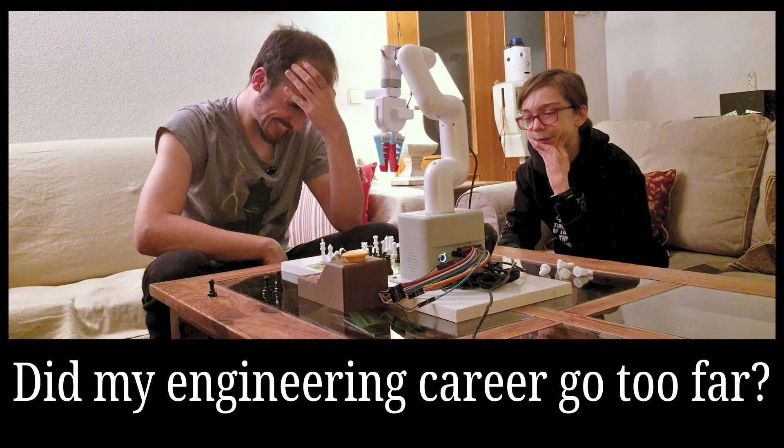This is a robot arm I coded to play chess completely by itself. And this is a chess Grandmaster, one of the best players in the world, about to be beaten by it. How did we get here? Well, hold tight, because this gets crazy.

So first, the big question: how did I get my hands on one of these? It all started when the guys at Elephant Robotics, a Chinese robotics company, contacted me for a collab. They offered to sponsor a video with a robot of my choice, to make a project of my choice, and afterwards I get to keep the robot. Of course I was thrilled, it was the deal of my life.

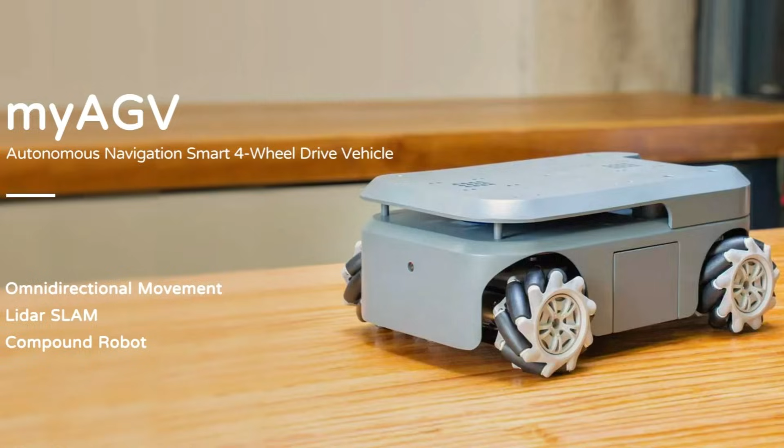I already had some experience with mobile-based robots, and at the time I couldn't think of a cool project to do with one of those, so I decided to go with the myCobot robotic arm. I came up with a few ideas for what I could do with it, and I do intend to do them all eventually, but for this collab I would turn it into a chess player.

But I wouldn't just settle with making it play chess, oh no. I would turn it into a player so insanely skilled that no human could ever beat it, not even the world's top Grandmasters.

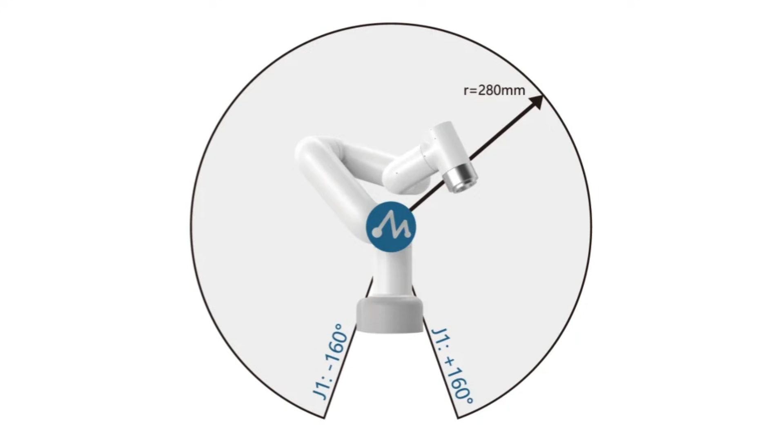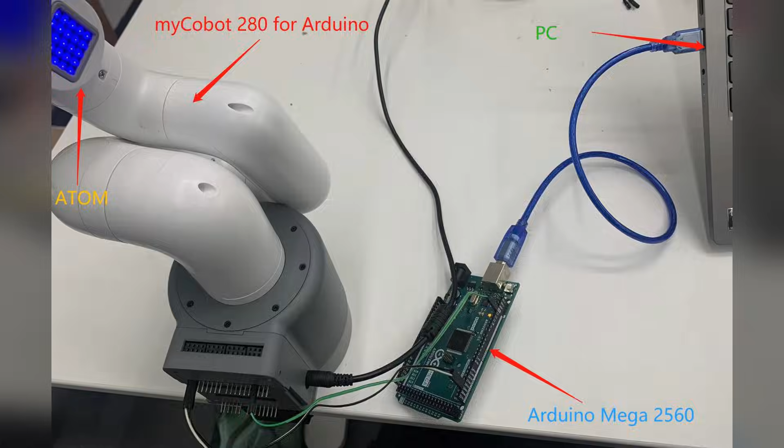However, I had a choice to make, because they offered 4 different flavors of the myCobot 280, with 280 standing for its 280mm working radius, basically depending on the way you control it. There's the myCobot 280 Arduino, meant to be controlled with an Arduino. There's the myCobot M5, a more user-friendly version which can be programmed with simple apps and drag and drop.

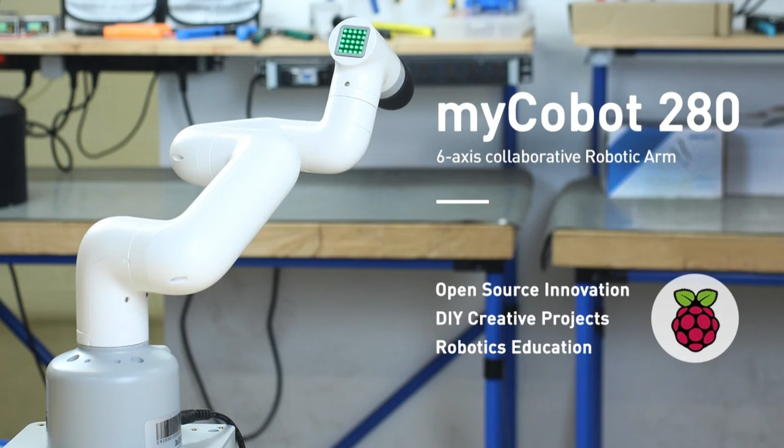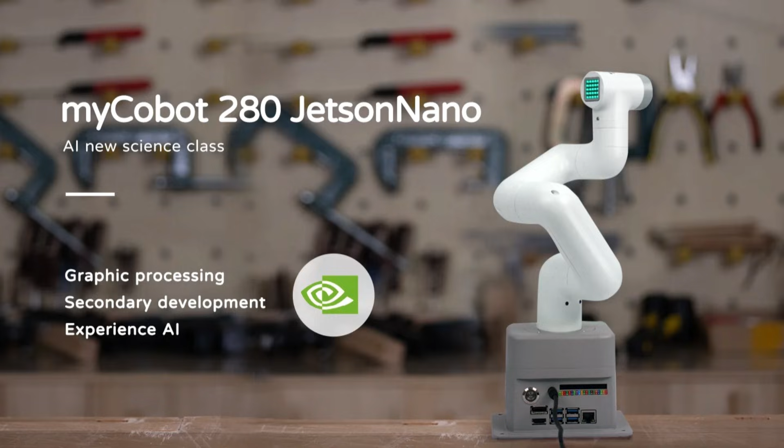The myCobot Pi doesn't require an external computer to code it, because it has a good old Raspberry Pi inside, with its own Linux environment with ROS and whatnot. And finally, the myCobot Jetson Nano version, which is like the Pi version, but with a Jetson Nano instead.

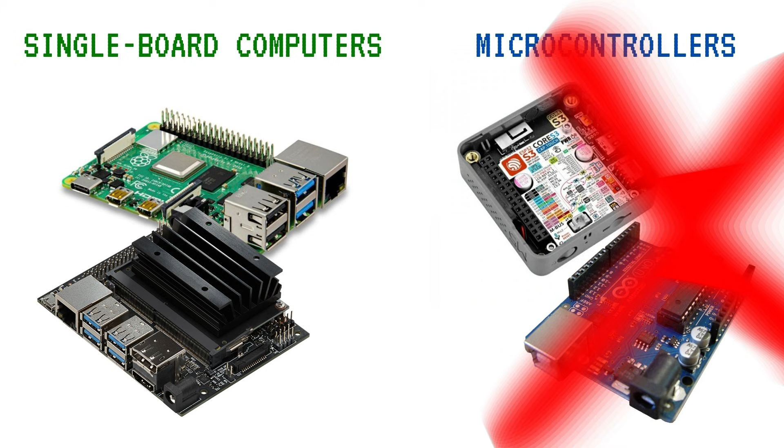Now, if I was going to make an AI-integrated robot, I'd need an SBC and not a microcontroller. That left me with a choice between the Jetson Nano and the Raspberry Pi, and I didn't really break my head over the decision. The Jetson Nano was designed to run AIs and computer vision, which I'd need, while the Raspberry Pi is more general purpose and slower for this task, so I just went with the former.

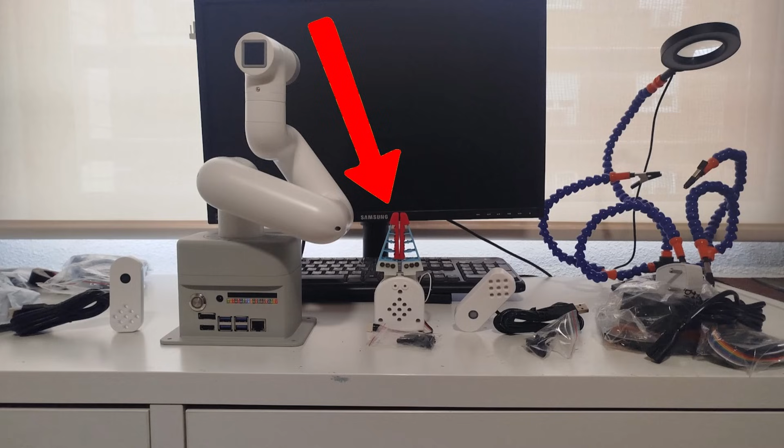So I sent them my choice, and shortly after, two much anticipated packages arrived at my door, one containing the robot, and the other containing the flexible gripper and USB camera flange which I'd need for my purpose. Although the arm itself already came with a camera, so now I have two. Well, I'm not gonna complain.

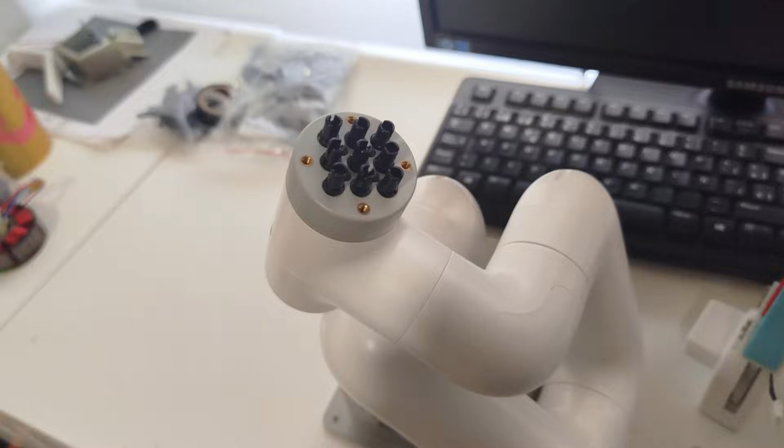The way you install hardware on the arm is quite interesting, because it has actual Lego holes at the end where you can plug in these actual Lego pieces. If you've ever used them, you know they can get a bit aggressive, but the customizability it offers is really cool, and I'm pretty sure you could technically build anything out of Lego and turn it into the arm's tool. Anyway, I attached the camera, which has these same holes, and at 1 megapixel is almost as good as the camera I used to record myself.

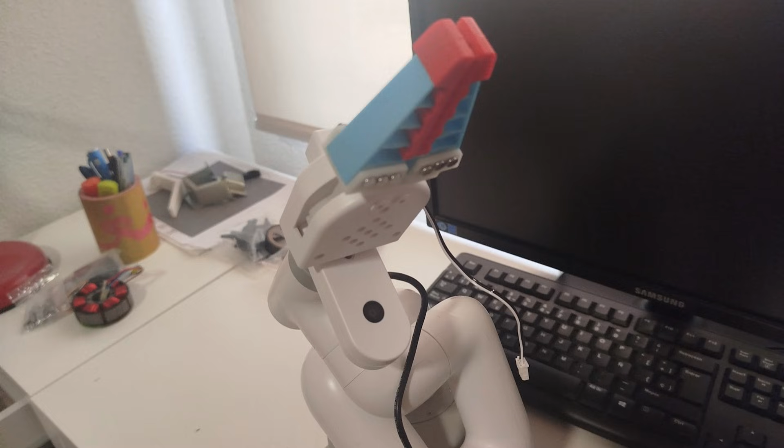Ouch. And then I inserted some more Lego pieces onto its holes to attach the flexible gripper. After having researched a ton about grippers for my own robot and making several prototypes myself, I just want to take a moment to appreciate the amazing technology behind this thing.

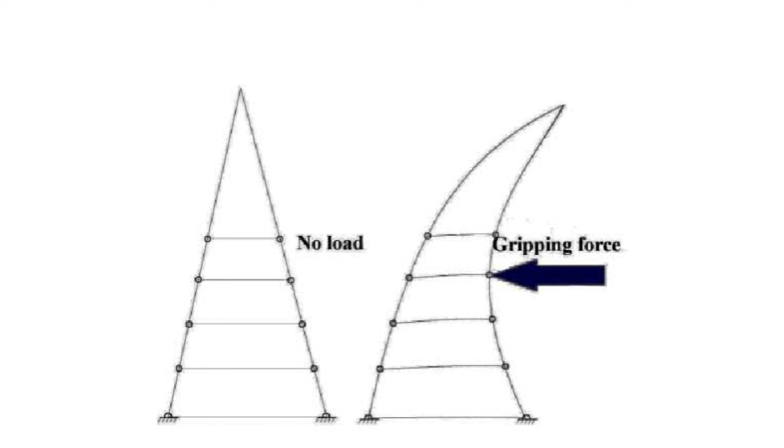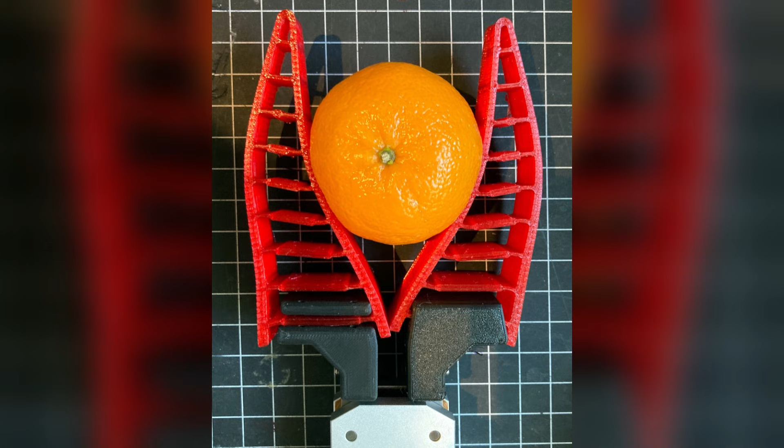The shape of the flexible gripper isn't just for looks. It's actually a mechanism that uses the Fin Ray effect, which is apparently registered as a trademark. Well, just see how it works for yourself. It can wrap around objects it grabs without using any joints whatsoever. I'm telling you, fingers are so overrated.

Anyway, with that out of the way, it was onto my physical setup. I had done some calculations about the size of the board, keeping in mind the robot's operating radius and the size of its base, and settled on a 21 by 21 cm board, separated 3 cm from the robot's base.

I designed it on Canva with my custom colors, which both contrast well with the black and white pieces, something that would be extremely important for the robot to reliably read the state of the board, and kind of make it look like a chess.com board.

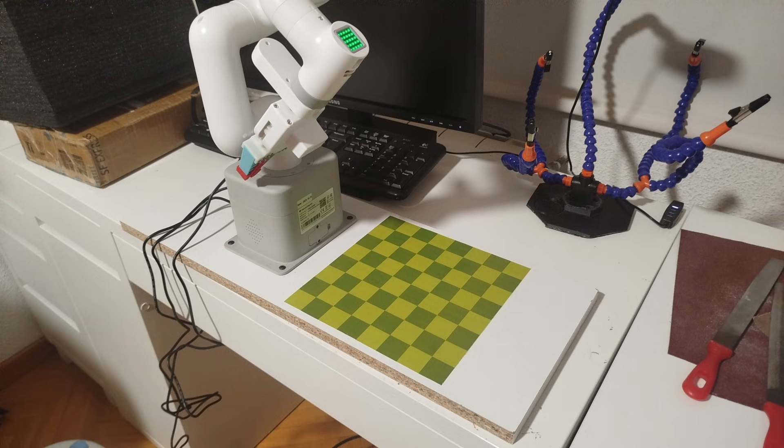So I cut that, printed on special paper, and as the base, took this nice wooden board from my basement. I then made the measurements, glued the chessboard, and screwed the arm's base onto the board, and my basic physical setup was complete. I'd need a bit more of a user interface later on, but at this point, I just couldn't wait to start coding my new gadget.

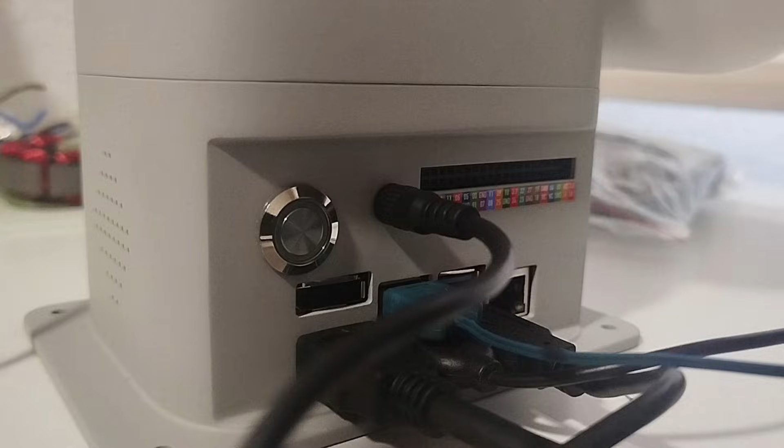Booting up the arm for the first time is actually surprisingly easy. You just plug in its power supply cable, connect a keyboard and mouse to it, and wire it to a monitor using the included HDMI cable.

However, my monitor was broken, so I decided to connect to the desktop through VNC like I do with my robot, although the arm has an Ethernet port, so I was worried it wouldn't have Wi-Fi. Luckily, that wasn't the case, as I found out when I connected it to my TV through HDMI.

But it was really weird because it seemed to create a kind of Wi-Fi network of its own which other devices could connect to. I tried to scan the QR code, which was supposed to include the instructions for the arm, and it led nowhere, so I was forced to figure it out by myself by fiddling around with it.

Turns out the Wi-Fi the arm created is a hotspot which, when you connect your PC to it, is precisely meant to allow you to connect to the arm through VNC or SSH without even having to connect it to your local Wi-Fi network. And it even had VNC set up already.

Although it does mean that whatever you connect to the arm loses access to the internet, so I connected it to my home Wi-Fi instead and took it back to my room.

The next part wasn't that smooth though, because with X11VNC, the one the arm used, the only thing smaller than my budget for coming up with jokes about small things was the screen size. Classic headless problem. I fixed that by setting the resolution with a cron job at startup.

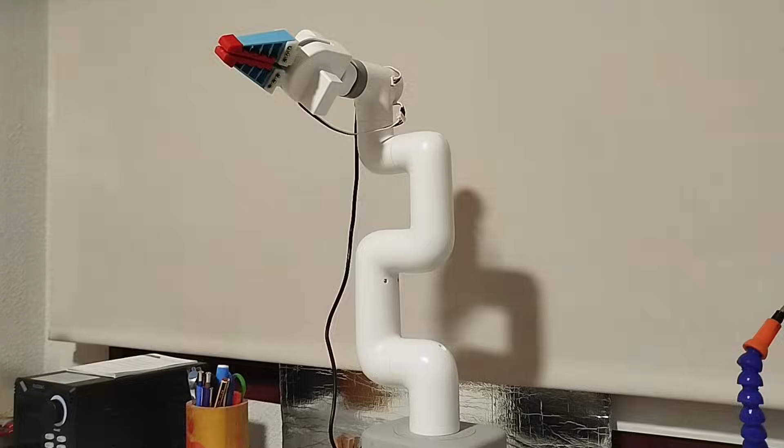With that out of the way though, I was welcomed by a pretty complete desktop. I opened this myBlockly app, and it turned out to be a block code editor to control the arm. It also had this drop-down panel which allowed me to read and set each joint's angle, and it worked right out of the box. It was really cool to see the arm moving for the first time.

There was also this other myStudio app, which apparently was supposed to be a kind of central hub for all of the robot's apps and tools. Although it did let me connect to the arm's serial port, most apps were completely empty, and the few apps it did seem to have just opened a browser window to an empty GitHub repo.

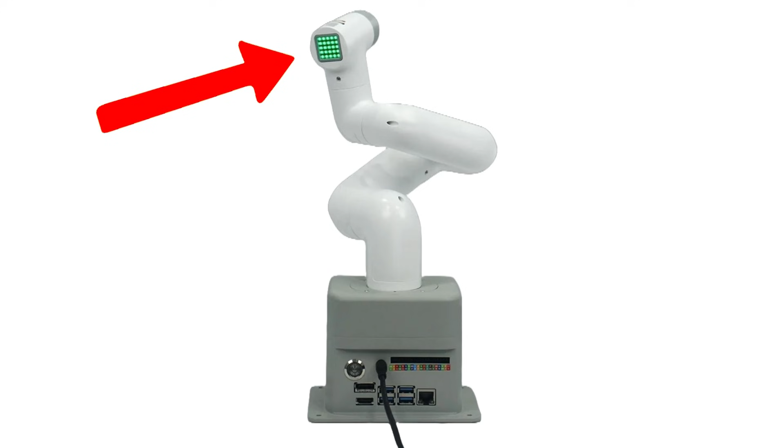As I had to find out myself due to the non-working manual, and as they later confirmed to me, this app is really meant to be installed on your PC to control the microcontroller versions of myCobot, and in my case was only useful if I wanted to flash firmware into the Atom, that microcontroller at the end of the arm with the LED matrix, which as far as I know is in charge of the inverse kinematics and joint control. Although that already came flashed, so yeah.

All that didn't really matter anyway, because the main tool I'd use to make the software for my robot would be VS Code, as you can also control the joints programmatically using the simple and handy myCobot module. And here's where we get to the juicy part, the code.

Because here's the problem. When you look at a chessboard, you can pretty easily tell that there's a pawn there, a rook there, a queen over there, which color they are, and if a player moves a piece, you can tell what they're doing. But how do you teach all that to a robot?

This might sound more straightforward at first than it actually is, because I ended up having to tackle problems at basically every step of the process. For starters, how do you tell the robot what, out of everything it's seeing through the camera, is a square of the board?

For this, while waiting for the arm to arrive, I had thought of using a warp matrix, which, as its name suggests, is a matrix describing how you warp an image, like those document scanners do. This turns the board the robot is looking at from an angle into a 2D square, as if it was looking at it exactly from the top.

And if you get the size right, when you divide that resulting image into an 8x8 grid, each square in that grid will be a square in the board. That's easy enough, but it's not much use if the robot can't tell what it's looking at, because to play chess, you need to know where there are pieces, what color they are, and what type they are.

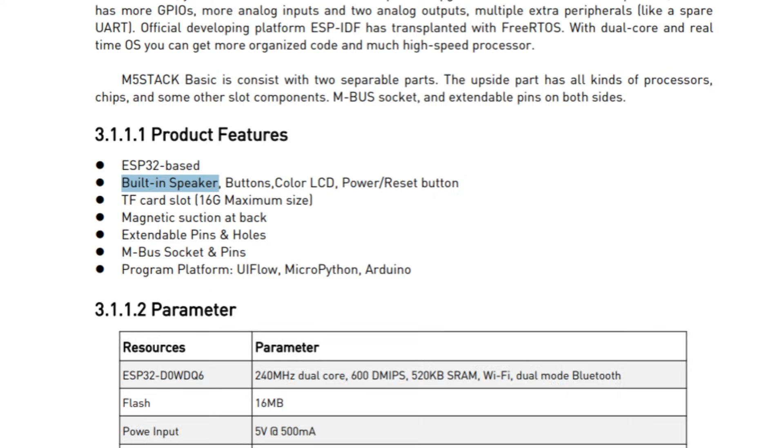Now, before I had to use WAV files because I only knew about PyAudio, but I discovered this other module, PlaySound 3, which is much more straightforward and supports MP3 files. Although, unfortunately, even though it said in the datasheet the ARM had a speaker, mine didn't, so I had to get a little USB speaker for it.

But anyway, then the program hangs, waiting for you to press Start Game, at which point a new board object is created and Stockfish is properly configured, because you can actually decide how powerful you want it to be, and in fact you can set the specific ELO you want it to reach.

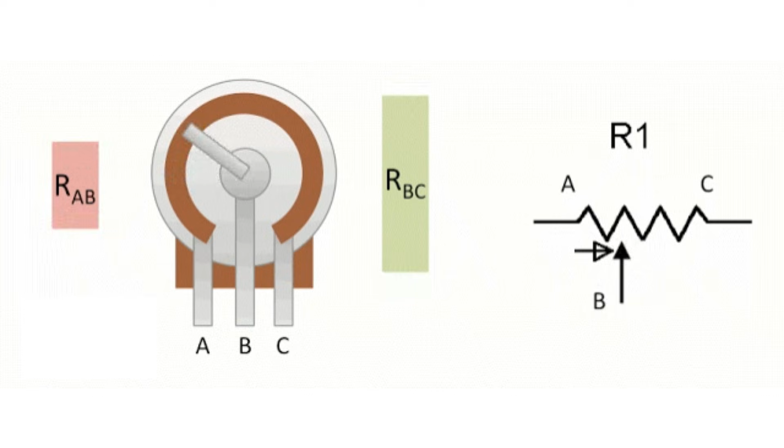Now, it would have been really cool to set this with a potentiometer, so you could set any value you wanted as the ELO, but the Jetson Nano doesn't support analog input, and even though the Atom does, that function is not exposed in the firmware the ARM uses, so I was out of luck for that.

Instead, I bought this big old rotary switch with 12 positions, one of which turned out to not work, and assigned a value from 1320, which I forgot to mention is the minimum and probably already beats the vast majority of the world's population, to 3190 as the maximum.

I configure Stockfish for 2 threads, so it can use 2 of the Jetson Nano's 4 CPU cores, 256 MB of hash, which is the RAM I'll allow it to use, limit strength to true, and the ELO to the corresponding value. Well, except in the maximum position, where I set limit strength to false, and Stockfish just plays as formidably as it can, with no ELO limit.

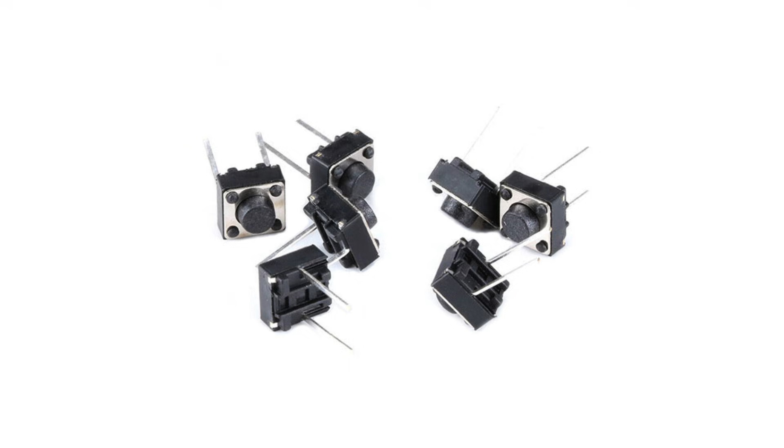Then the robot waits for you to make the first move and press the Move Made button. I didn't want to have it be a boring old standard button like the rest, so I ordered this huge heck of a push button instead, which electrically is probably overkill, but at least it'll look cool.

If it contains exactly 4, we check if those moves are promotions, and if they are, the robot prompts the user to press either the Queen, Rook, Bishop or Knight button to select which piece they're promoting their pawn to. However, if there are multiple matches and they're not promotions, an ambiguity has happened.

They are rare, and at first I expected my new method to fix them, but I realized that if a piece could capture multiple other pieces by simply replacing them, the board would look the same in the end in all cases.

If this happens, which again is not often, partly because the thing's so good it barely even lets you take its pieces, the robot reads the possible matches and you press the button when you hear the move you've made. For this I went full local and synthesized a sound file for every single square in the board: I couldn't tell what move you made, press the big button if you did.

G5 to H7. So once we've got the human's move, we push it to the board object and it's time for Stockfish to respond.

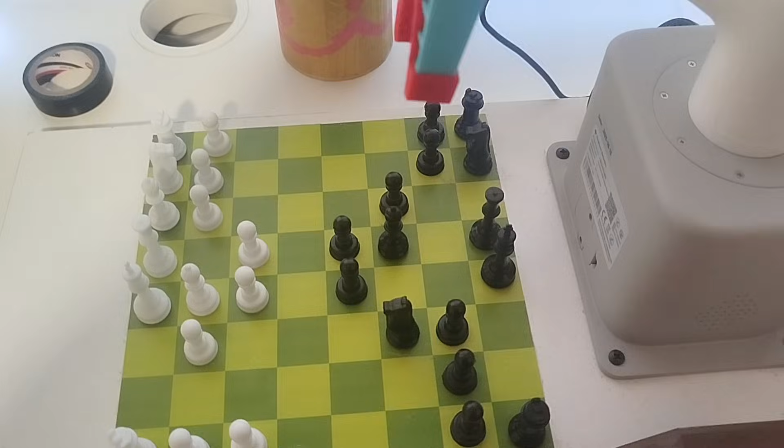Then, we push that move Stockfish made to the virtual board, and the game continues until it ends or you give up, at which point it'll be game over, so the loop will exit and the robot will play a little sound file depending on who won.

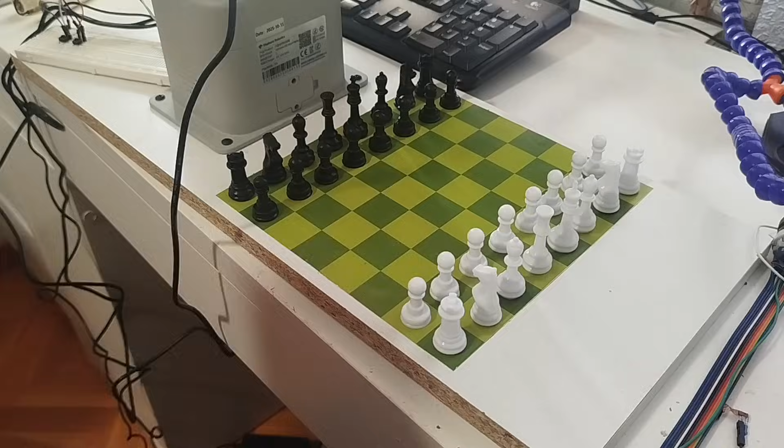So, with the code done, I tested it on a temporary setup, it absolutely destroyed me, and I decided to make my little control panel.

I started by making a button board with the start game, give up, and promotion piece buttons, using the same style and measurements I've used for my past controllers. I then designed a knob for my rotary switch, which I think looks pretty cool, and made this section for it where it tells you the elo each position corresponds to.

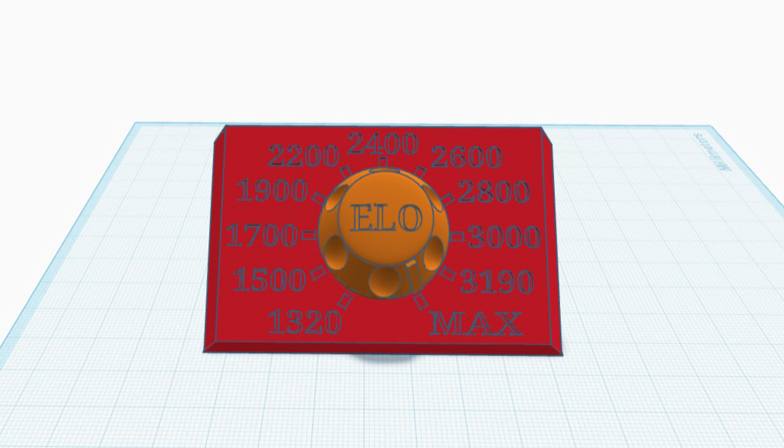Then, once the big button arrived, I took its measurements and made this third stage at the top for it. I combined it all into this cool case, added a hole for the cables to come out and two smaller holes for screws, broke it down into pieces with measures to be able to easily put it together later, and sent them over to my 3D printer.

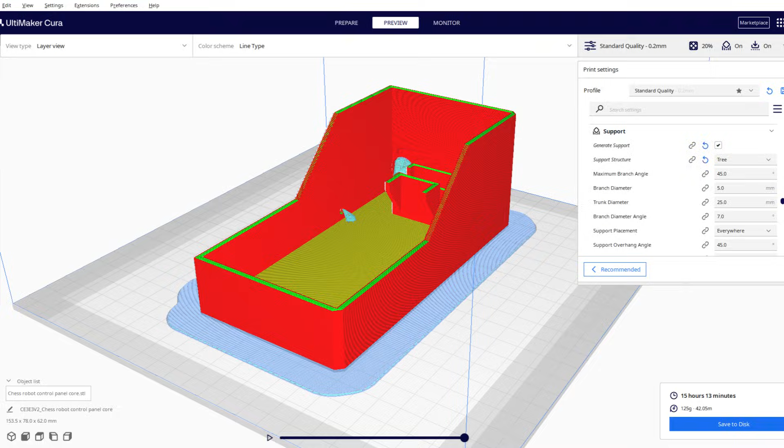Up first was the base, and look at how insanely cleanly that fits. And then came out the button board, to which I attached my little buttons.

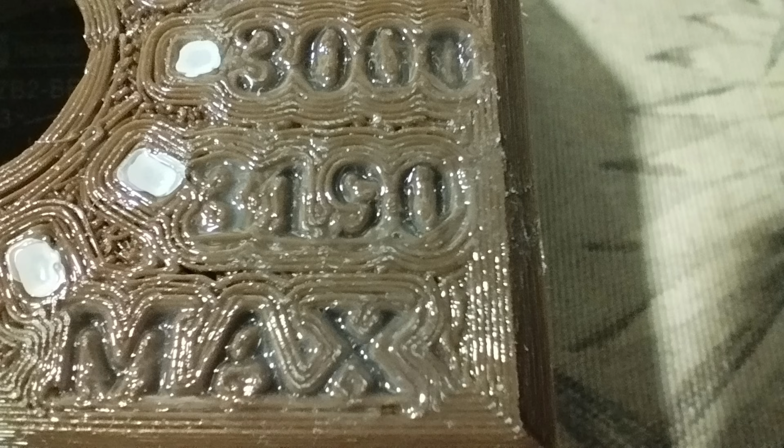However, for the rest of the parts, I realized you couldn't really see the text, especially since I'd printed some of it upside down to cut down on supports. I first tried to solve this by filling them with white glue, but it ended up turning transparent, so I panicked and marked it with correction fluid instead. It didn't turn out perfect, but it's readable.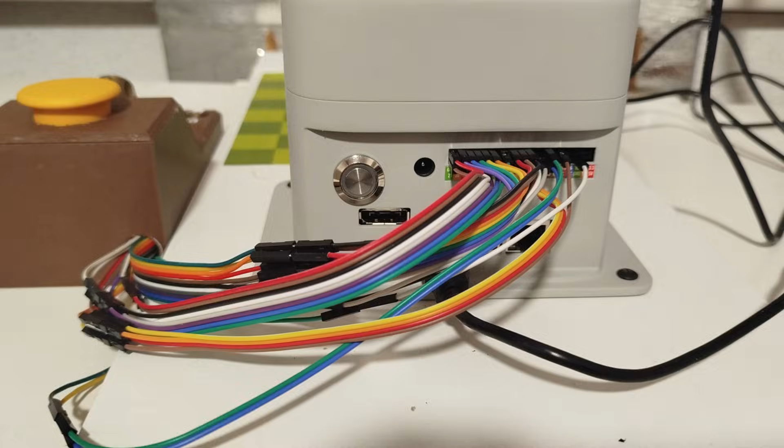So I screwed the base onto my board, assembled the section with the small buttons and the one with the knob and the big button, put it all together, and wired it to my arm. And I will admit, like a third of the cables are GND because I wasn't gonna bother making a common ground when I had just enough GND pins for every button.

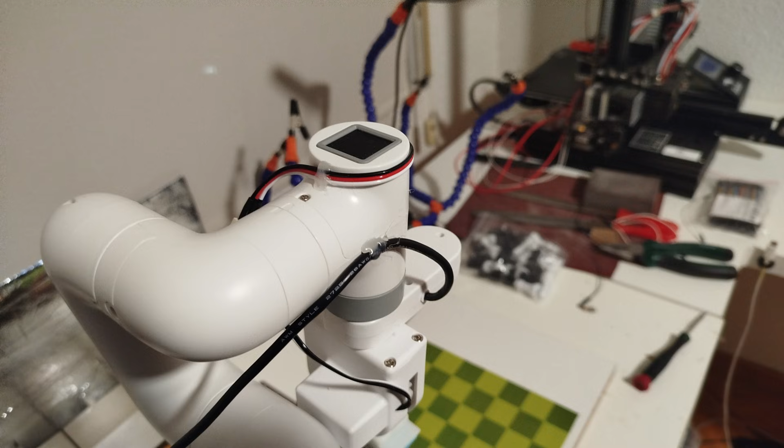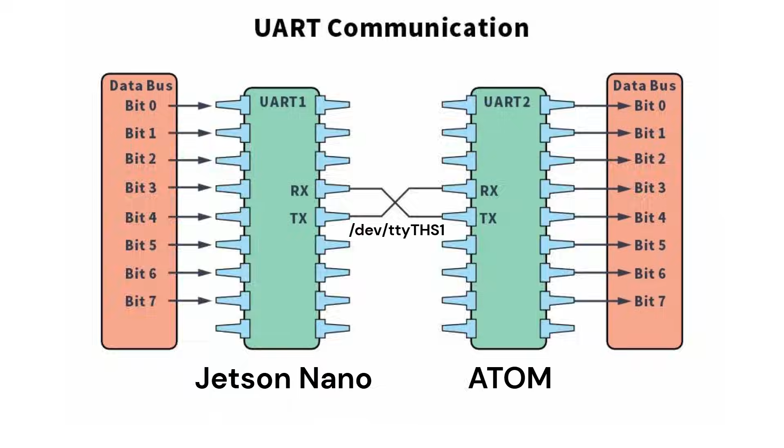I then glued on the speaker, tidied up the cables so they wouldn't be all over the place, trimmed the board a bit, and added some banding to it. Then I created a startup app to launch my script, which at first gave me some issues because the UART interface took up the THS1 serial port shortly after boot.

My robot was officially done. However, to test the actual prowess of my arm, I needed someone far more skilled than me. So I decided to look at the chess.com leaderboard for my country, Spain, and contacted the top few Grandmasters, inviting them to come over to play against my arm.

No one seemed to read my message, but then I got my only response, from Álvaro Alonso Rosell, a Catalan player whose elo currently sits at 2,544, placing him as the 7th best player in Spain and 214th in the entire world. His rating is even better in Blitz, where he ranks 3rd in Spain and 109th in the world.

Anyway, all of this goes to say, this guy is the real deal. I was honestly surprised as I live pretty far from Catalonia, but it turned out he had some travels planned near me and would be able to come. Of course, I was absolutely thrilled and eagerly waited for the moment.

However, when relocating the arm to my living room, I ran into a problem: it suddenly became unable to distinguish occupied squares. Looking at the debug frame, I noticed it seemed to be correcting the image automatically, and thinking that might be the culprit, I disabled white balance correction, manually set the brightness, and it worked. Last minute save right there.

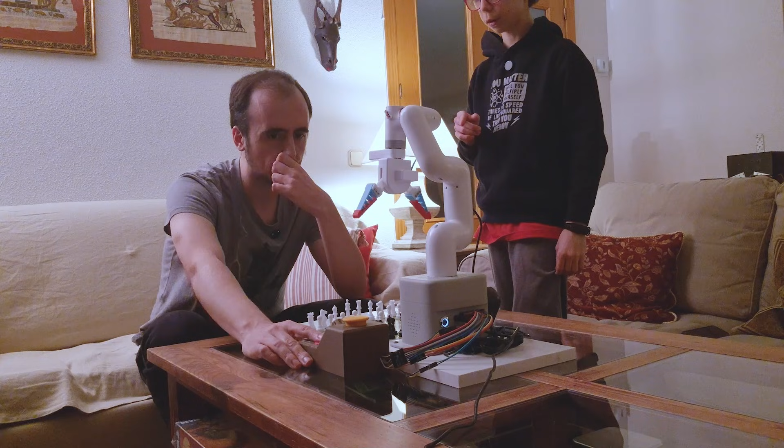Shortly after, I switched on the robot, and he decided to give it a go at the lowest possible elo to get a sense of its playstyle. To my relief, the visual system worked like a charm, although it wasn't fully accurate when commanded positions. Still, it was enough for its task, and once Alvar was satisfied with his first taste of the robot, he gave up, which would be a very funny clip out of context.

Gave up already? Wanna try again?

And directly dialed it up to full unconstrained power. Alvar started his game with the Catalan opening, which he is famous for, and an intense battle followed in which he remarked the engine was quite aggressive.

Also, it's not just beating me slowly, no. He's playing full on style here. Yeah, yeah, wow. Like I could teach this game to my students and they would learn quite a lot, because he's using dynamic chess.

One by one, the robot started to take his pieces with no respect, I guess. He doesn't have any respect for my position. And shortly after, before anyone could realize, the robot had already put him into a dead end, and in a few moves had his king completely cornered.

And just like that, it checkmated a world-class Grandmaster like it was nothing.

Oh man, he doesn't even give me the hand or something. Yeah, oh my god, wow, it feels so strange. Like I don't know, like I couldn't believe it's that good, you know.

The Jetson Nano's fans hummed in satisfaction, and the arm's quest to prove robot supremacy was complete.

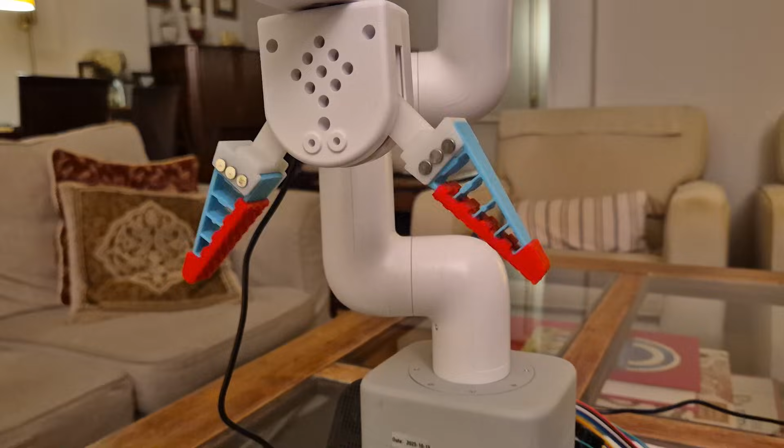Also, what absolutely baffled me was that after the game, the dude just casually entered the entire thing, move by move, into his laptop by memory. You see, Alvar actually has a YouTube channel, and in fact it was his editor who kindly sent me the shots he took with his far superior camera and mics, where he'll be analyzing the game in detail. So if you like chess, do make sure to check it out.